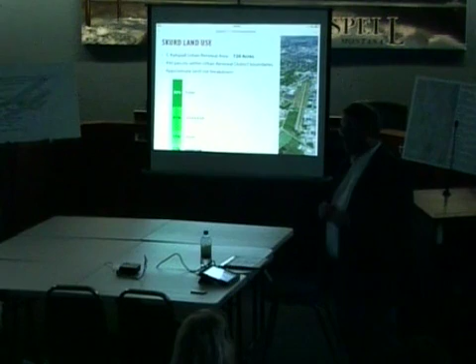We also had a number of work sessions with the general public and opportunities for everyone to come in. I see many familiar faces out here, so a lot of you have been a part of driving what we've generated for the South Kalispell Urban Renewal District.

Just as a reminder, this is a 720-acre project, looking at an overall plan for the 720-acre core area in the south of Kalispell. There are 450 parcels - 36% public, about a third commercial, and the rest residential or vacant.

There's an existing TIF district within the area. There's 230 acres - there's a map over here that shows where that's defined. Approximately 103 owners within that area, and the city is the largest owner within that general area. 71 acres of the airport area is part of the TIF district.

Again, talking about the public engagement process - this gives you a little bit of information about what we did during that course. When we were hired, we were tasked to really spend some time boots on the ground getting folks involved, getting opinions, and listening to that.

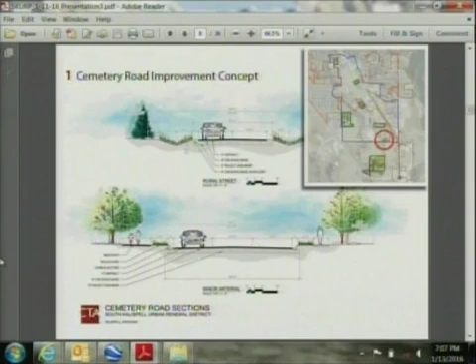You can look at and see the location of the ring road, the southern portion of the new ring road. During our last meeting, we pointed out that's probably part of the reason why Cemetery Road is becoming so busy, so we felt there's a need for improvement.

We've identified and put costs in dollars to that. It's very detailed within the plan, but again, this is an executive summary proposal or presentation tonight.

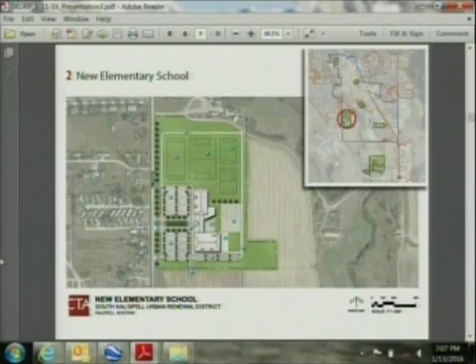You all know there's a new elementary school planned for that south area here. This is not the design of it, but a theoretical conceptual plan of that location, again on the west side. We also talked about a dog park.

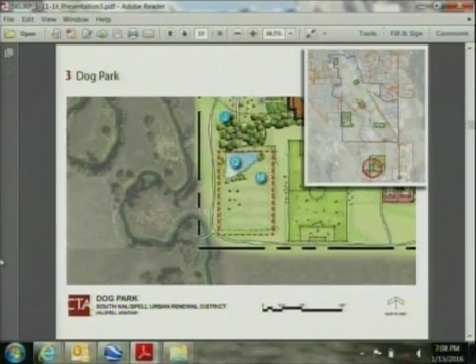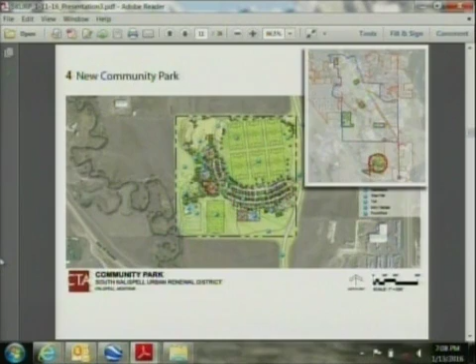In this image and the following one, we see a dog park as an integral piece of what could become a new community park. This is a concept where we took a lot of the thoughts and comments we heard from the public, to include a concert area, an amphitheater area, options for soccer and football fields, and maybe a new community center in that area. We've identified a cost for that and how it might play out in the south portion of Kalispell.

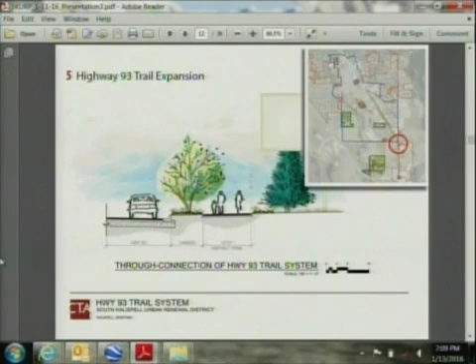Trails, I mentioned, are very important to you all. We hear that over and over again. Highway 93 has an implementation program where, as development occurs, landowners build the trail in front of their roadway. We see that as a piecemeal option, and think a better use would be to do it all at once—build a linkage trail that's not only recreational, but an alternative transportation mode taking people from the southern portion of Kalispell and linking it to the downtown area.

The other thing we heard about was opportunities for commercial and light industrial development. As you head around Flathead County, you see a lot of sporadic light industrial. We see this as an opportunity for catalyst projects, maybe a new business park within the south area that's more defined and refined rather than sporadic along the highway.

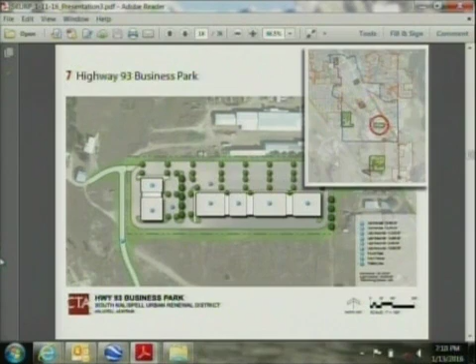So we've got options for that, as well as, if the airport were to remain, there's a key opportunity for a new entry to the airport. This is actually located on private land, but we see it as an opportunity for an aviation-oriented business park that caters to aviation needs.

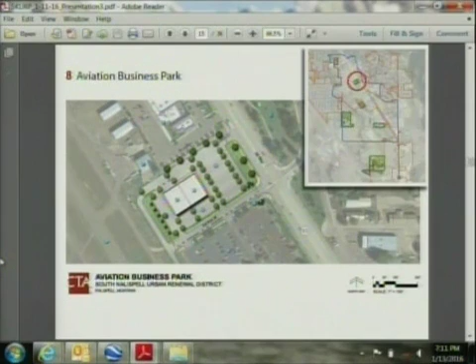As I mentioned, part of that is the airport's kind of tucked in there. If you're not from Kalispell, you don't necessarily know it's there until you see a plane fly out. It's a little hidden, and maybe opening that up would embrace the condition of flying and the fact that there is an airport there.

Located to the southwest is also an opportunity for a park and ride, or an area where people could park and access a trailhead for the trail system throughout the area. We would also consider having a trail system along Cemetery Road that connected east to west and then tied into Highway 93.

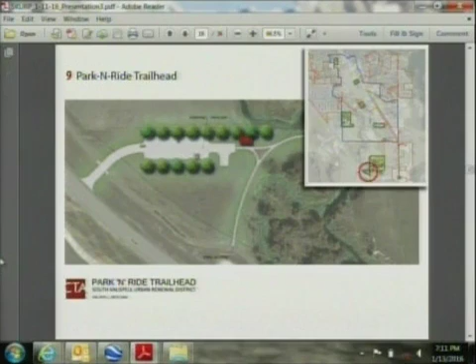One of the other development options within the city is that the city actually owns land within the central core, in the heart of the downtown South Kalispell area, as shown in the next slide.

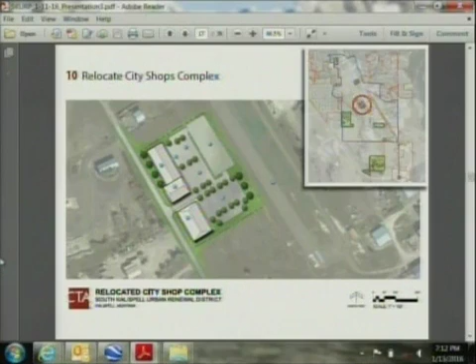We see an opportunity with these two to relocate the city shops out of the downtown area, move them onto the more industrial character of the existing airport ground, and then repurpose that land—maybe selling the property and encouraging urban development with mixed-use tenants.

For instance, we were thinking the area might be developed with live-work components, where you have commercial development on the first floor, yet apartments and condominiums above.

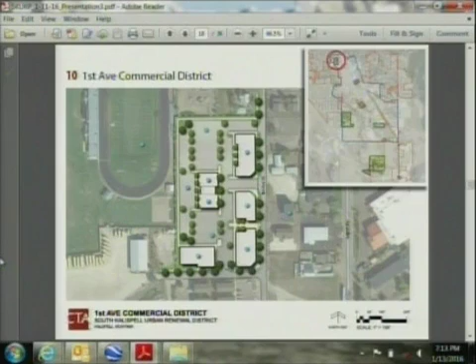So this is a concept, an adaptive reuse of that existing ground, giving a better land use for that valuable urban core area.

Along that line, we also pointed out a laundry list of potential funding options. Many of those projects could be funded using existing TIF funding, industrial development bonds, general obligation bonds. Of course, a lot of those lands are on private ground, so private financing would be there, but there's also the opportunity for public-private partnerships in some of these.

With that, we get to the heart of the matter, and that is what to do with the airport. We've spent an incredible amount of time looking at and trying to evaluate what's been done in the past, because there's obviously been a lot of work done prior to this in trying to determine what to do and how to improve the existing airport.

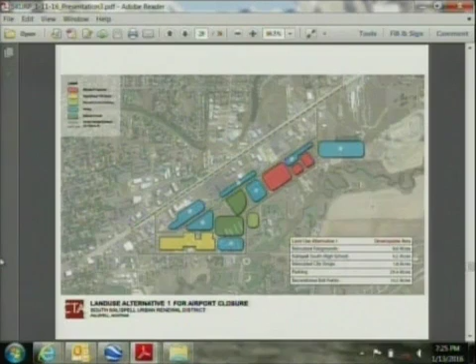A second alternative is looking at this in more of a public or private land sale, and we're just citing that in most of this area we would have some level of commercial or residential activity. But there's 72 acres out there, and it's important to note that has a considerable amount of underground, significant mainline infrastructure.

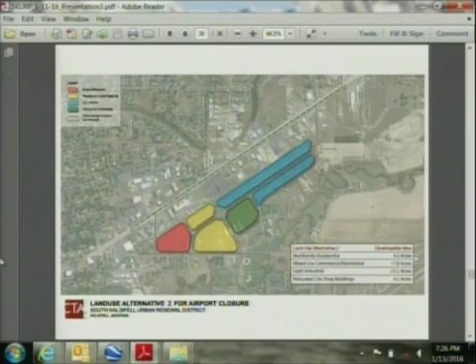So that, from a development standpoint, is a fairly good thing, because that's an existing cost that all too many times, if you're developing land, is not already in place—you've got to bring that in. Here, a lot of that exists to some extent. It's all in how you develop it. So there are a lot of options for that.

I mentioned alternative 3, and this is where a lot of confusion has taken place. Using FAA funds—you all know the FAA funding in the previous effort was voted down by a ballot issue, where citizens of Kalispell voted not to accept FAA funding for that project. The city could go back and re-engage the FAA, in this case not looking to expand the airport, not lengthening the runway, not reorienting it from runway 13-31, but to look at whether the FAA would be willing to invest in the airport as currently aligned.